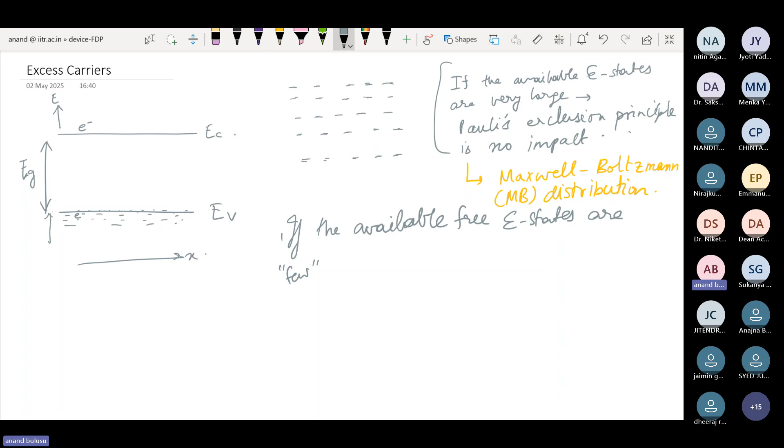So if the available free energy states are few, these are all layman kind of language, not a formal way of looking at things. But we want to develop an intuitive understanding, that's why we are doing this. If the available energy states are few compared to electrons, so what it means is then Pauli's exclusion principle has an impact on the distribution.

Okay, so this kind of a distribution is called Fermi-Dirac distribution.

So these distributions are derived in a way similar to the way we do in say 11th, 12th standard. It is like you have n number of boxes, and you want to fill them with balls. Each box has an occupancy of two balls. How would they get distributed if there are 100 boxes and 10 balls coming, if there are 100 boxes and 90 balls coming, like that. So those problems, the way you solve, the same way these distributions are solved and derived. This distribution formulae I will be giving directly, but they are derived in the same way. It's the same kind of arguments.

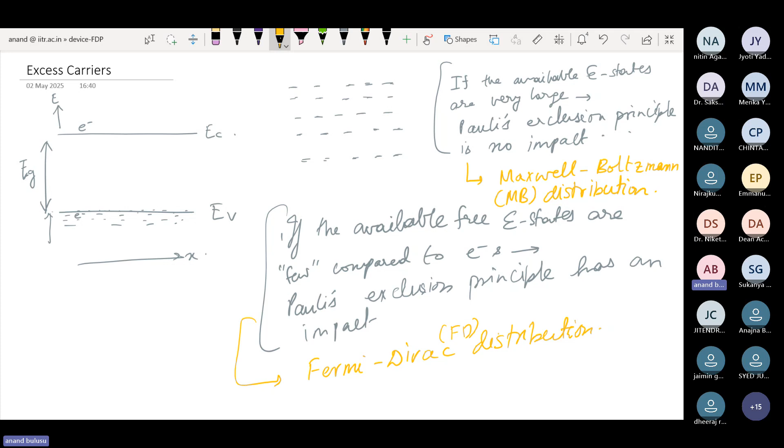Only thing is that you are now not with 100 boxes and 90 electrons, 90 balls, but you are dealing with some 10 to the power 20 boxes and 10 to the power 12 balls, like that. So you are dealing with very large numbers, and that is how this distribution formulae come. But otherwise, the way they are solved or derived, this distribution formulae is just like the way we did it in the case where you needed to find out the probability of the balls being distributed, which would depend on when there are certain number of empty boxes and certain number of balls to be distributed within those empty boxes.

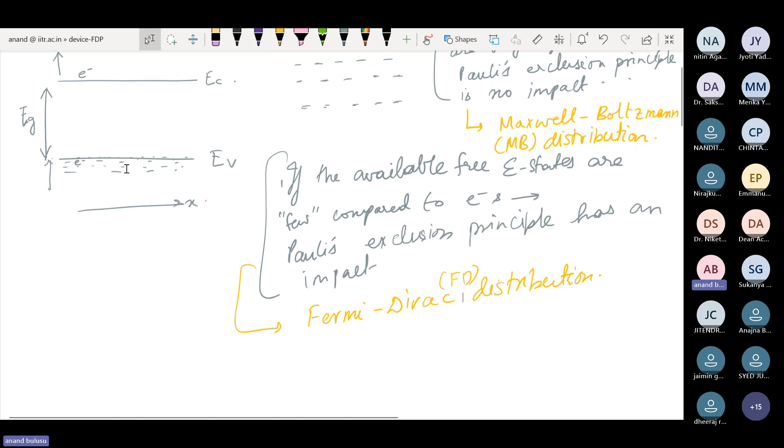Okay, so what is this Fermi-Dirac distribution? Now these electrons are here at 0 Kelvin. What would be the nature of the electron? Suppose you are not dealing with semiconductor, say silicon, but you are dealing with a metal, suppose.

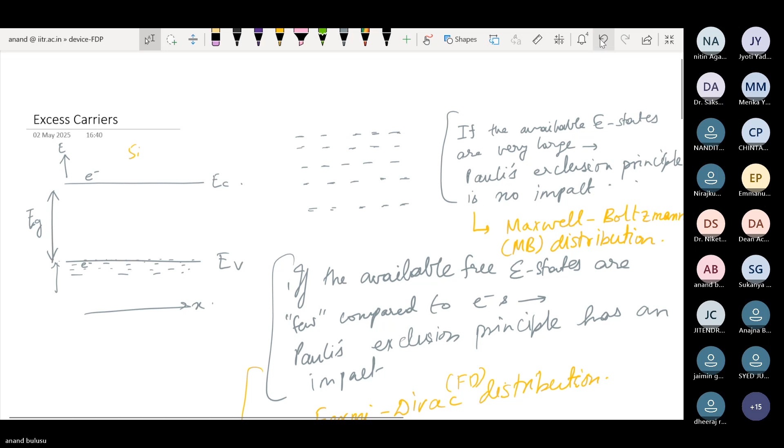Suppose you are dealing with a metal. So in metal, there are these two... you will not find these two bands and all that. It's all a continuous band of energy states.

So in that, what is the distribution? You find that at 0 Kelvin, the electrons are all within a certain, below a certain energy level. So all the electrons are below a certain energy level at 0 Kelvin. So the electrons have no energy in that sense, I mean they are bound tightly and they have no ambient energy coming from the ambient environment. So they are all below the so-called Fermi level.

Okay, once there is, or you can also plot it this way. Sir, I'm sorry to disturb you, your presentation is not visible to us.

Maybe you need to present it again. Okay, so was it visible earlier? Ah yes, it was visible. Just now it is not visible, sir. Okay, so maybe I need to share it again. Yes sir, it somehow got hung and therefore I had to redo it, so I think I need to reshare it. Now is it visible? Yes sir, now it is visible, sir. Actually, tell me if you have already covered the topics that I'm discussing. Sure sir, I have not covered these topics. So you are going right, sir. Yes sir, so tell me whenever I need to stop. Okay, yes sir, yes, yes.

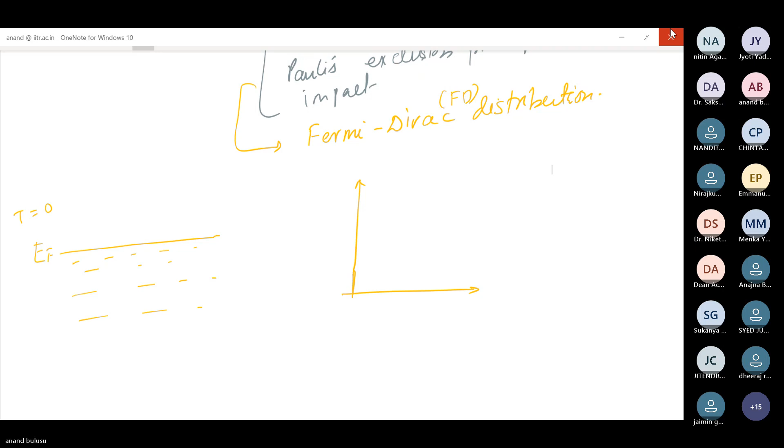So this is energy, and suppose this is the number of electrons.

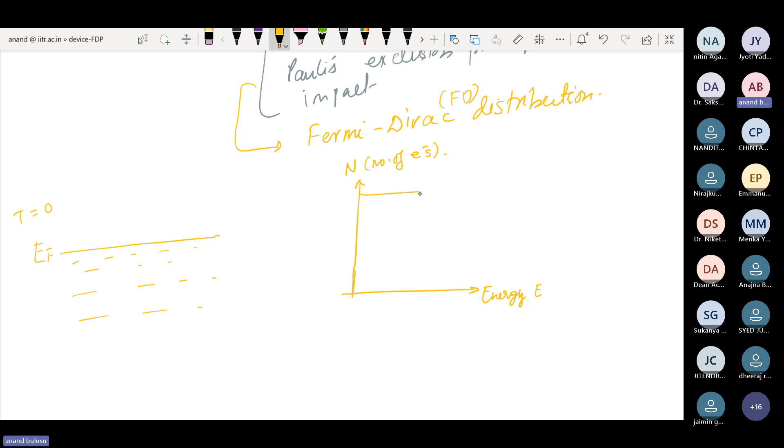And this is energy, electron energy. Okay, so at temperature T = 0, what you find is that the number of electrons is like this. And this energy we call EF, Fermi energy or Fermi level.

Suppose we are dealing with a scenario where all the energy levels can have equal number of electrons. So there are equal number of energy levels available below and above the Fermi level, and energy levels are all symmetric. We are dealing with that ideal kind of material. Below the Fermi level, all the energy levels are now occupied at 0 Kelvin. So this is for 0 Kelvin.

Now you have increased the temperature slightly, so T1 greater than 0. What is the distribution now? It would look this way.

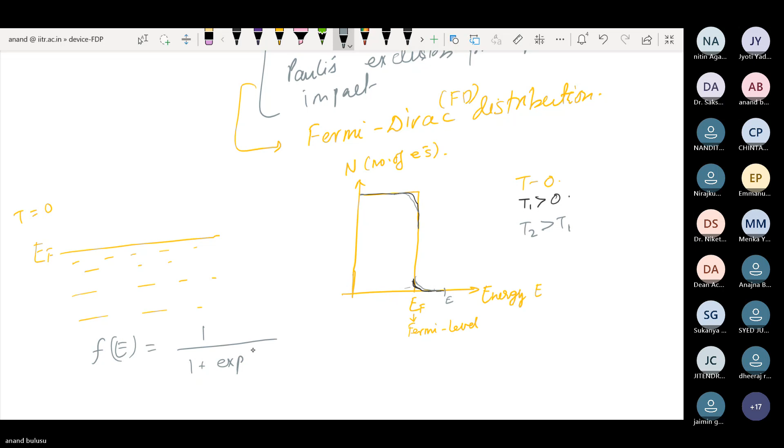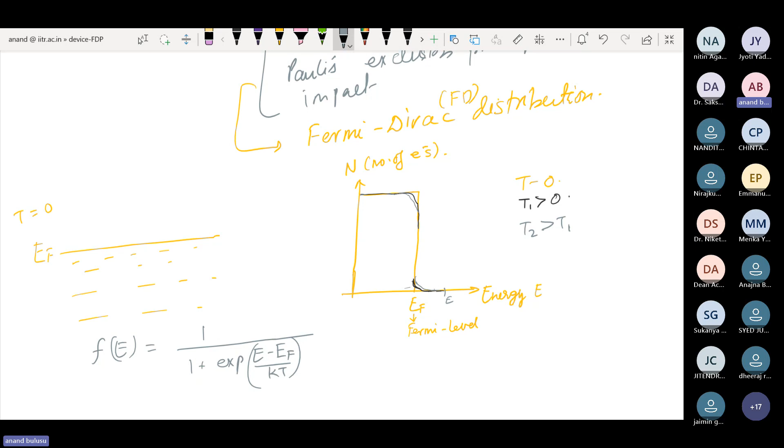So how can this be represented mathematically? You would say that the probability of occupancy of an energy state E is 1 by 1 plus exponential of E minus EF by KT. K is Boltzmann constant, T is temperature, EF is this mathematical quantity, Fermi level or Fermi energy. So this is the probability distribution function - the Fermi-Dirac probability distribution function.

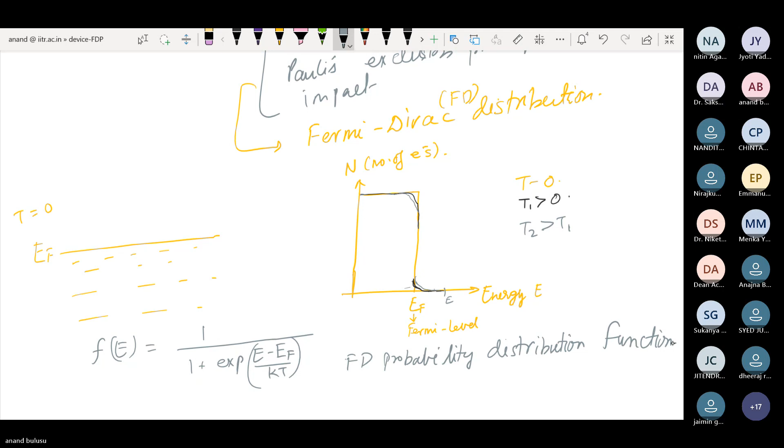So how does this behave? As E increases beyond the Fermi level, if the temperature is 0 Kelvin, this will correspond to a very large value tending to infinity, and therefore f of E, the probability, would be 0. And when E is smaller than EF, then this would tend to 0, and f of E would tend to 1. That's why you have this distribution as a step here at 0 Kelvin.

As you increase temperature, suppose now temperature has been increased to T1 here. So when you increase E beyond EF, this will now be larger than 1, but it would not tend to infinity. And therefore you have a small value here. It is large because it's an exponential function.

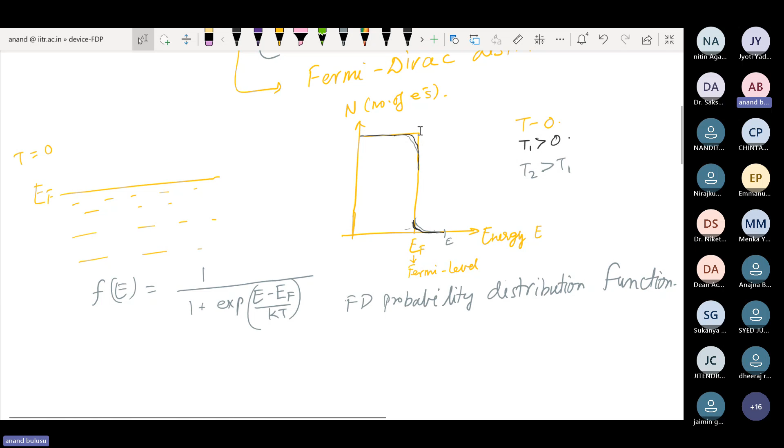What about the energy values here? You would find that as E is smaller than EF, E minus EF is a negative quantity, and therefore this exponential term is smaller than 1. If it is smaller than 1, then obviously f of E is smaller than 1, but it is not very small. So this is 1, some normalized value - or you can say number of electrons divided by n cap, where n cap can be the largest number that can be occupied. Or you can also say that this is the probability of occupancy.

Probability of occupancy of each of the states. So it is not number of electrons, it is actually number of electrons divided by the maximum number possible for that energy state. That is like probability of occupancy of that energy state.

This probability distribution function is f of E, given by this formula. As we had seen at temperature 0, for any energy value larger than EF, this tends to 0, and for any energy smaller than EF, this tends to 1. So all the energy states are occupied for an energy E smaller than EF.

Now, as you increase temperature, we see that for E larger than EF, though this exponential factor term is very large, it is not infinite, it has a finite value. Therefore, f of E is now very small, but it is not 0. It doesn't tend to 0.

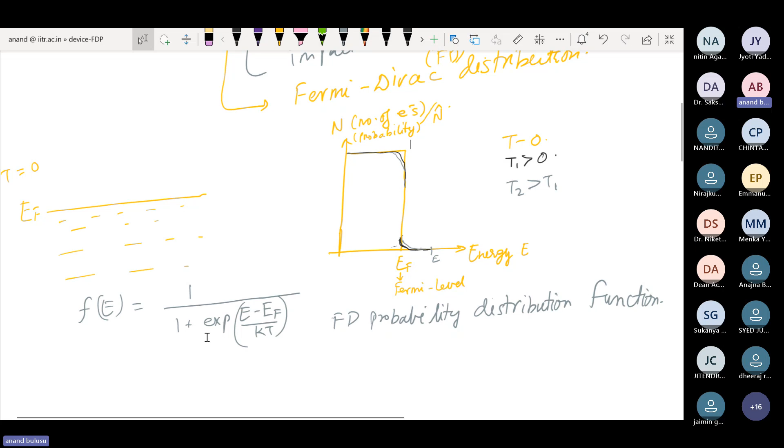Likewise, for energy smaller than EF, this is a negative value, and therefore f of E is smaller than 1, but still not 0. Suppose this value is 0.5, then f of E is 2 by 3.

Now you increase temperature from T1 to T2. What happens? For the same value of E, now this exponential term is smaller, so f of E is larger. Therefore, for the same energy, larger probability of occupancy is there above EF.

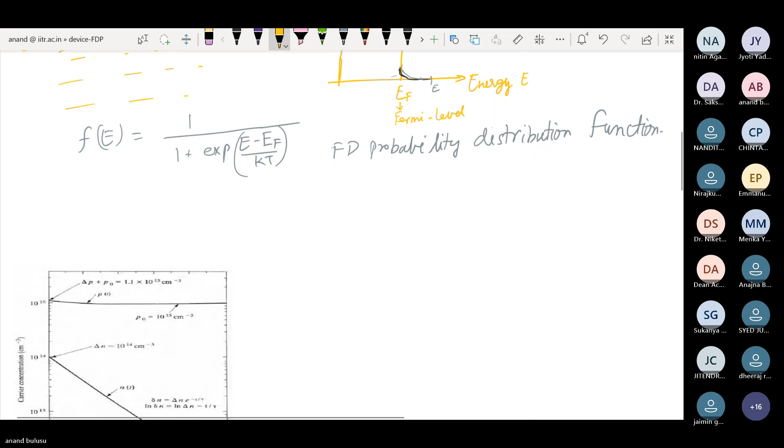Now let us see what happens for the same value of delta E. So f of E is 1 by 1 plus exponential delta E by kt. Let us say delta E1 is E1 minus EF, call this E1, and equally away from EF is E2.

Now let us say that delta E1 is equal to delta E2. But first let us write down the probability distribution function f of E2: that is 1 by 1 plus exponential minus delta E2 by kt. This is the probability distribution function now. If delta E1 is equal to delta E2, then what is the relationship between f of E1 and f of E2? Let us find out.

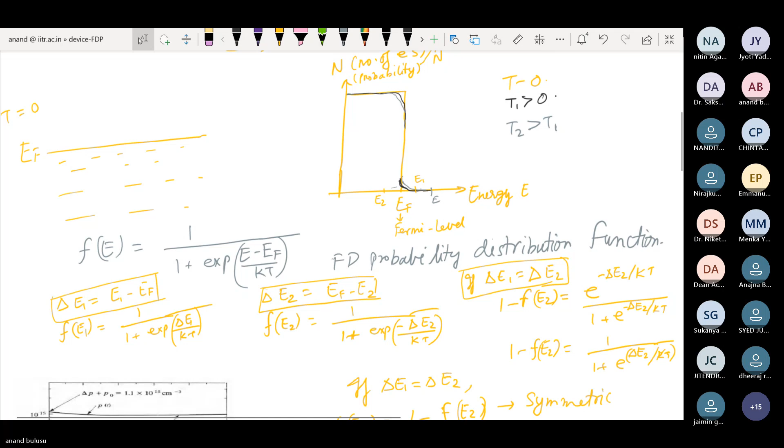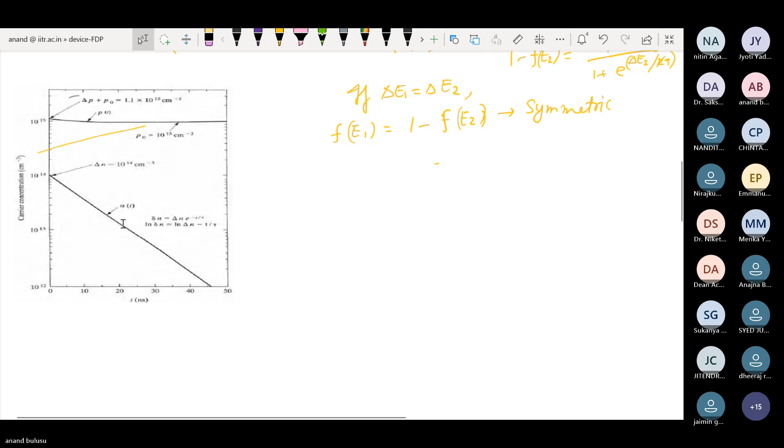Anything to discuss here? Let me manage the figures and then I'll again come back. Everything's getting messed up. It hangs. I don't know why it happens that way. It becomes hot and it gets stuck, so I'll have to share again. Yes sir, yes sir, just now the slides are not... yeah, yeah, I'll share again.

So now let us look at the semiconductor scenario.

Let us again look at n by n cap, which is the probability distribution, probability density, and let us look at this energy axis. So let us say that this is the value of Fermi level EF. So in semiconductor, as there was a discussion in the morning, there will be a valence energy band and a conduction energy band, and this is the energy gap. Let us draw it better, let us say that it is so close.

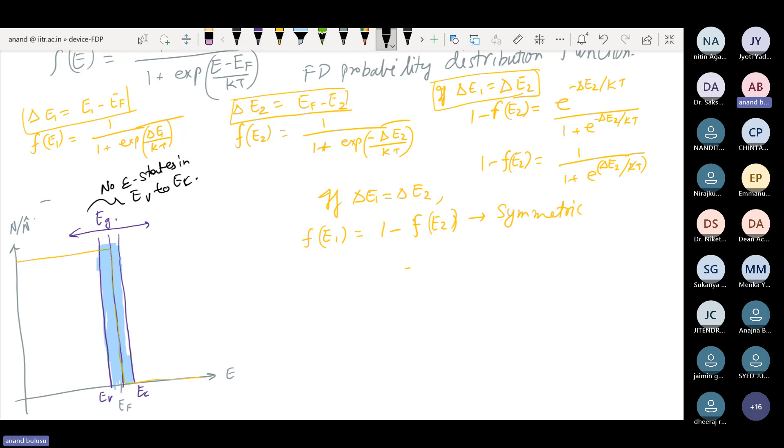So at 0 Kelvin, there is no occupancy in the energy gap because there are no electrons in the energy gap. It's not because of the Fermi Dirac distribution; there are no energy states available in the energy gap. No energy states in the gap EV to EC. Ideally there are no energy states there, and therefore the occupancy is zero. It's not zero because of the Fermi Dirac distribution; occupancy from EV to EC is zero because there are no energy states there. In all other energy states, the occupancy is same as in this plot.

So it's as if you have put this EC and EV here. Superimposed EV and EC here. It's as if you have done this.

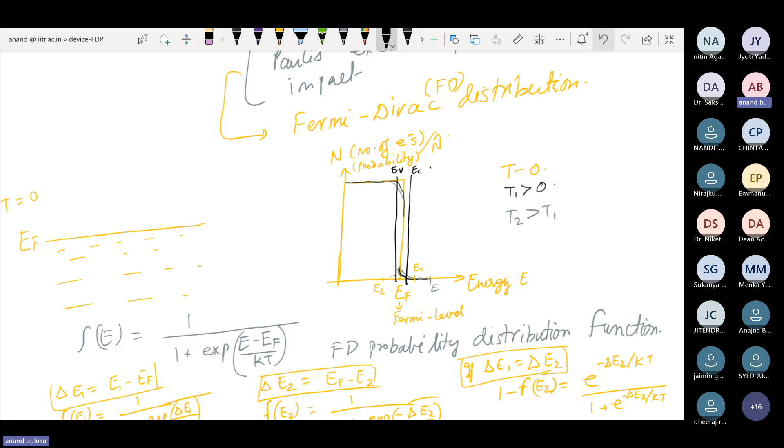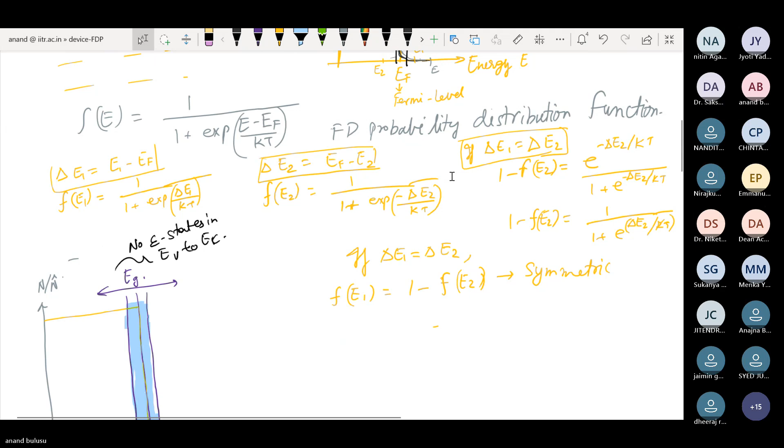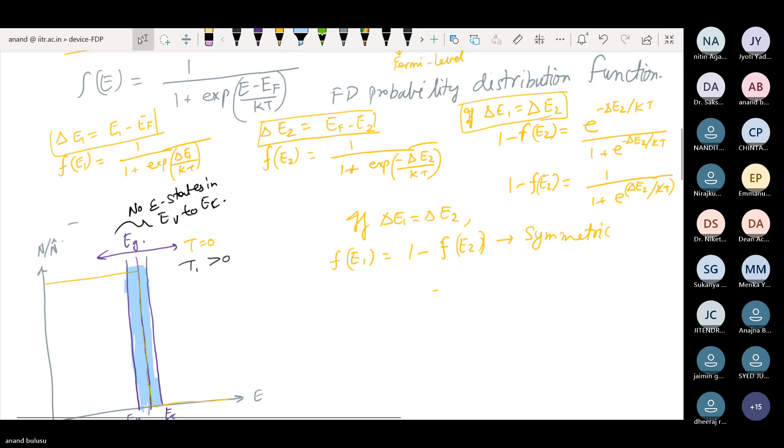Is that fine? So now again for the same value T1, which is larger than 0, you will have a similar distribution as earlier, and the symmetric one here. And for T2, which is larger than T1, you will have a similar distribution as earlier. So what is happening here?

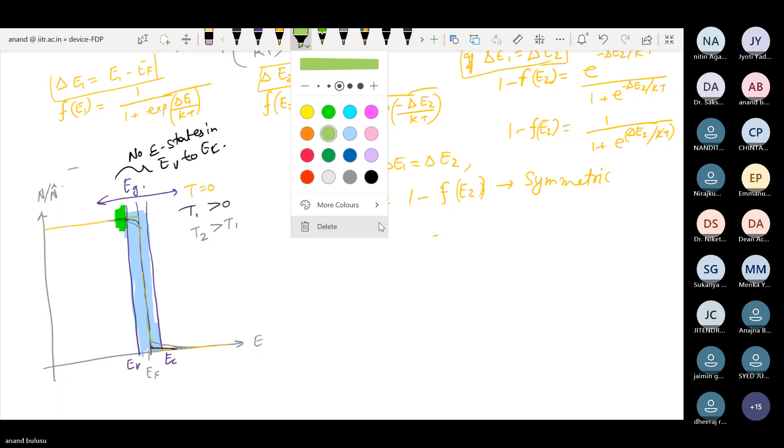So in the valence band, as you are increasing temperature, because of the more available thermal energy, electron states are getting empty. Likewise, in the conduction band, the electron states are being occupied, energy states are being occupied close to the conduction band edge. This is the conduction band edge. And close to the valence band edge, electron states are getting empty, because at the edge the electrons are having maximum energy. They have the maximum probability to gain thermal energy and go into the conduction band.

So is this fine? Now let us look at a scenario: where is this Fermi level? In silicon, this Fermi level EF is approximately close to EC plus EV by 2. It's not exact, but for all our calculations, for undergraduate teaching purposes, it is good enough to assume that for silicon it is EC plus EV by 2. And the energy band gap for silicon is around 1.1 electron volt.

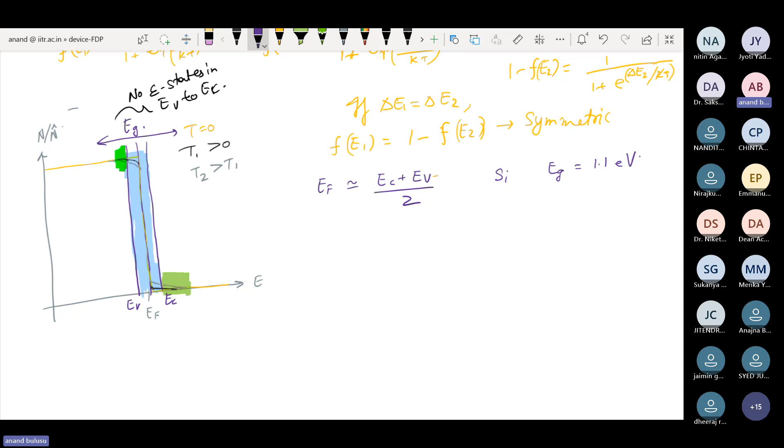So this energy band gap is nearly 1.1 electron volt. So what happens if EF minus EV or EC minus EF is very large compared to KT? Why are we discussing that? We are saying that this Fermi level in silicon is very close to EC plus EV by 2.

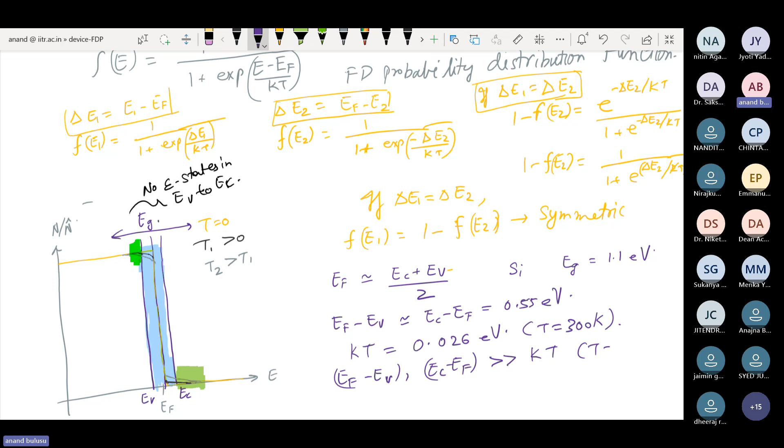Okay, and we know that, so what is the value of EF minus EV? EF minus EV is nearly equal to EC minus EF, which is 0.55 electron volt. What is the value of KT at room temperature? 0.026 electron volt. So EC minus EF and EF minus EV are both much larger than KT at room temperature. These are both very large compared to KT.

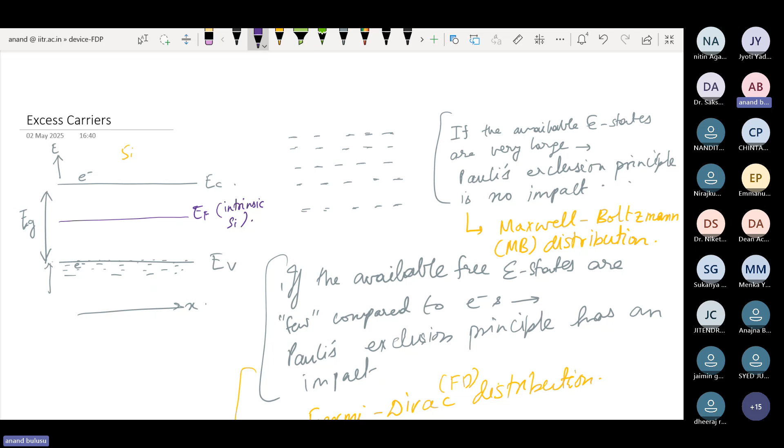Now, if I want to find out the electron probability of occupancy of electrons at the edge of the conduction band, that is in this band diagram here, and you are saying that in intrinsic silicon EF is here, so you are discussing the electron occupancy here and here. So how will you find that out? Just at the edge.

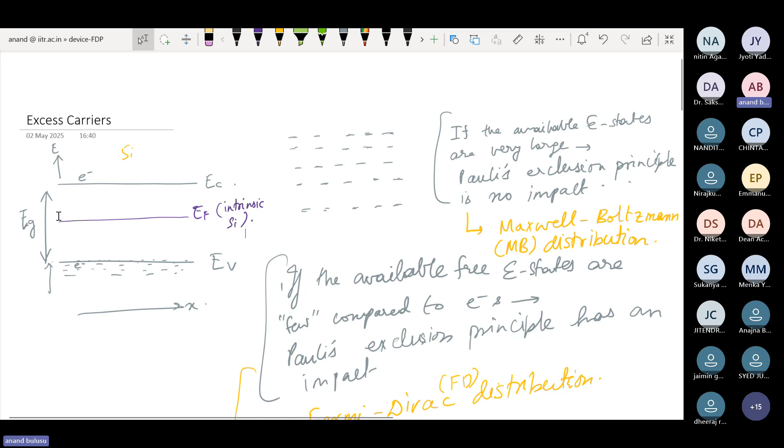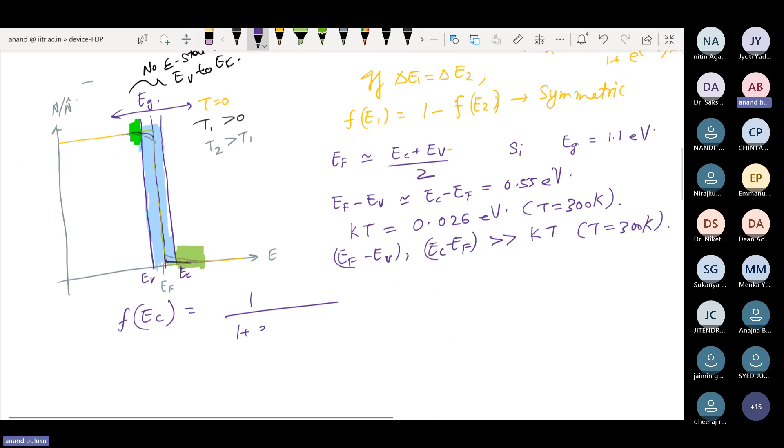One by one plus exponential of EC minus EF by KT. What is this equal to? This is when EC minus EF by KT is much larger than one. So therefore, this is a very large quantity, and this becomes equal to exponential of minus EC minus EF by KT.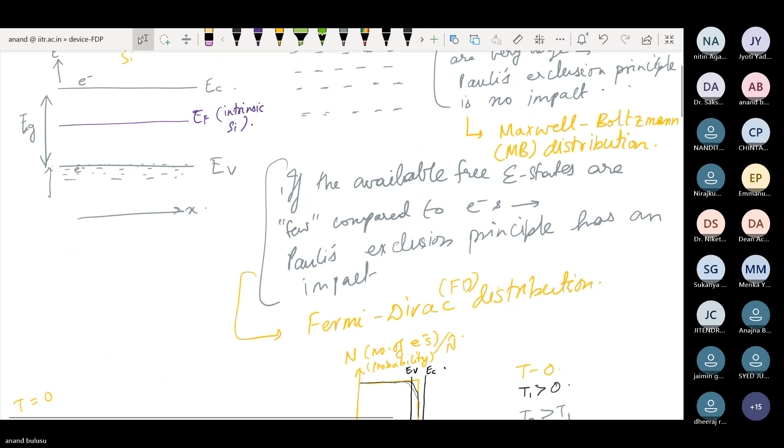Likewise, what is the probability of electron occupancy somewhere here, very close to EV? That is this band diagram here at room temperature. F of EV is 1 by 1 plus exponential of minus EF minus EV by KT.

Now we know that this is going to be a very small value compared to 1. So it will be like this: you know that 1 by 1 plus x, where x is very small compared to 1, is nearly 1 minus x. So likewise, this is then 1 minus exponential of minus EF minus EV by kT.

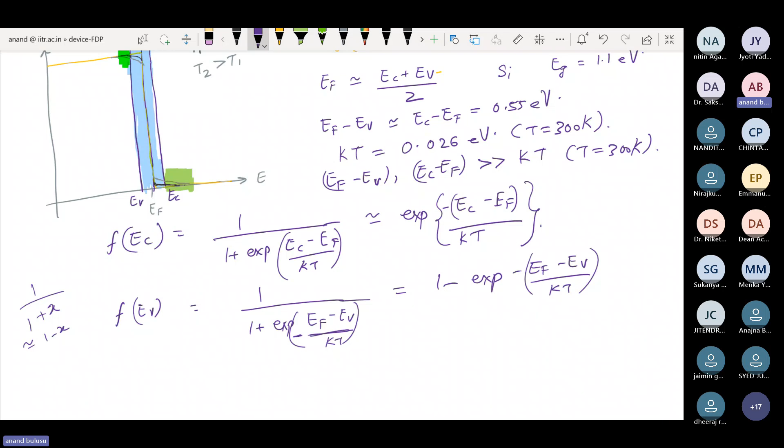So what is the probability of electron energy states being empty? 1 minus f of EV at the edge of the valence band. So that is exponential of minus EF minus EV by KT.

This and this look similar, and they should be, because as many electrons which leave the valence band and go into the conduction band, that should be the probability of empty energy states in the valence band. So what we are observing is that this is the Maxwell-Boltzmann distribution, and this is the Fermi-Dirac distribution. This looks like Maxwell-Boltzmann distribution.

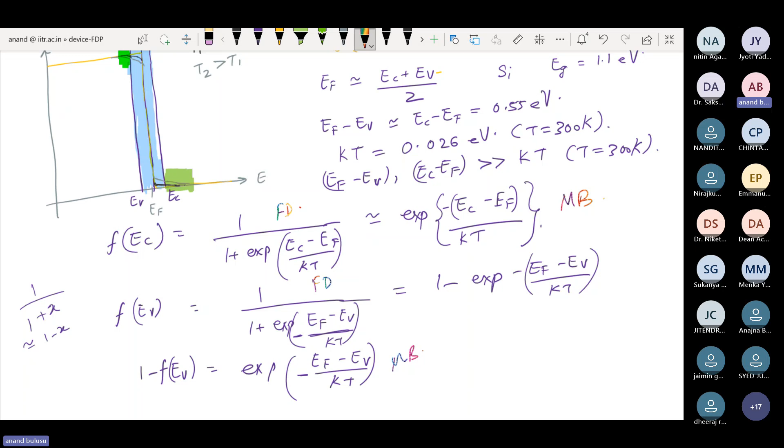So whenever E minus EF is very large compared to KT, the Fermi-Dirac distribution reduces to the Maxwell-Boltzmann distribution. What is the reason? Physically, as we discussed earlier, whenever EC minus EF is very large, almost all energy states in the conduction band are empty. Since they are all empty, Pauli's exclusion principle has little impact.

Now let us see one very important property: invariance of Fermi level in equilibrium. So let us rename the thing, let us call it...

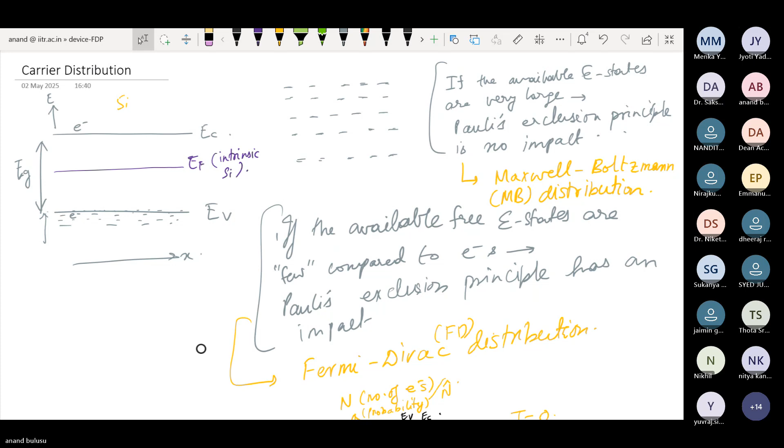Suppose there are two materials, M1, M2, two arbitrary materials, with this as the interface.

Suppose both the materials are close to each other, placed close to each other - any kind of material - and the entire system is in thermal equilibrium.

What do you mean by thermal equilibrium? If it is in thermal equilibrium, there is no net exchange of energy from outside the system, and also no net exchange of energy within the system. So what does it mean? It means net electrons would not be moving from one side to another, or net electrons cannot be moving from a higher energy state to a lower energy state. Because if electrons are moving like this, energy would be getting dissipated, and if electrons are moving upward in energy state, then energy would be consumed. So both cannot be happening in thermal equilibrium. It means the net number of electrons are not moving upward or downward the energy states - they must be balanced.

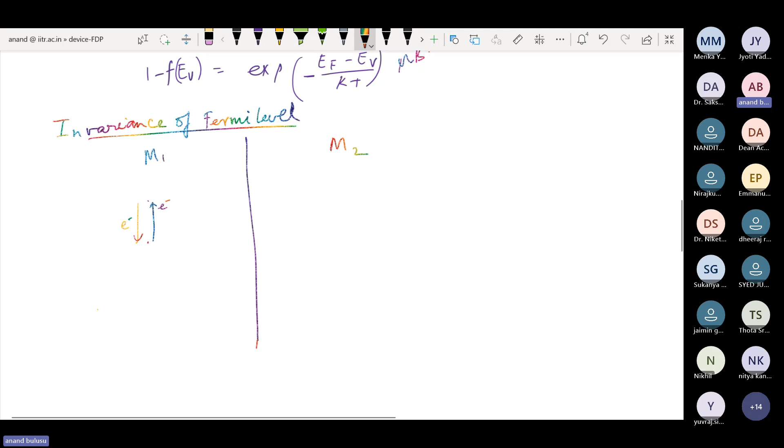Likewise, within the same energy state, if an electron moves from here to here, and net electrons are moving, keeping on moving, that means there must be some energy supplied for them to move in one direction, because otherwise there will be random movement. And that must be balanced again by electrons moving in this direction. So there cannot be any net exchange of electron energy from one higher energy state to a lower energy state, neither can there be a net movement of electrons within the same energy state.

So how is this possible? Let us see. Let us assume that there are two Fermi levels here. M2 has a Fermi level EF2, M1 has a Fermi level EF1. If this is the scenario, let us say that there are two electron energy states, or this electron energy state E. In M2, the number of energy states is N2, and in M1, the number of energy states E is N1.

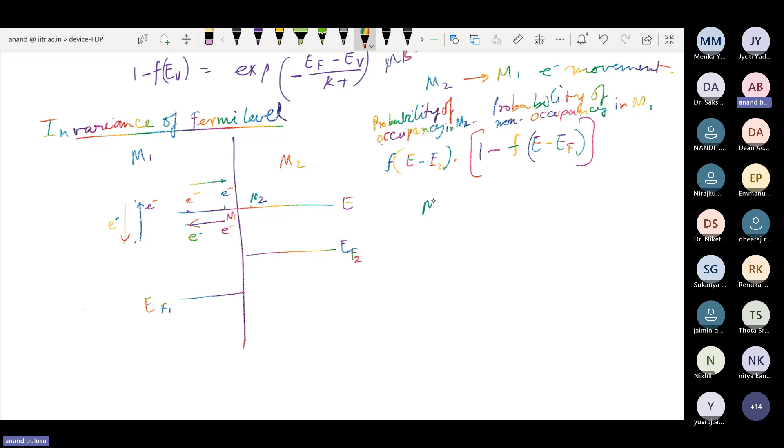Likewise, what is the probability of electron movement from M1 to M2? By similar argument, this is f of E minus EF1 into 1 minus f of E minus EF2.

Please stop me whenever you feel that I need to discuss again.

So in thermal equilibrium, both these movements should be equal, isn't it? Only then there is no net exchange of carriers, electrons. So f of E minus EF2 into 1 minus f of E minus EF1 is equal to f of E minus EF1 into 1 minus f of E minus EF2.

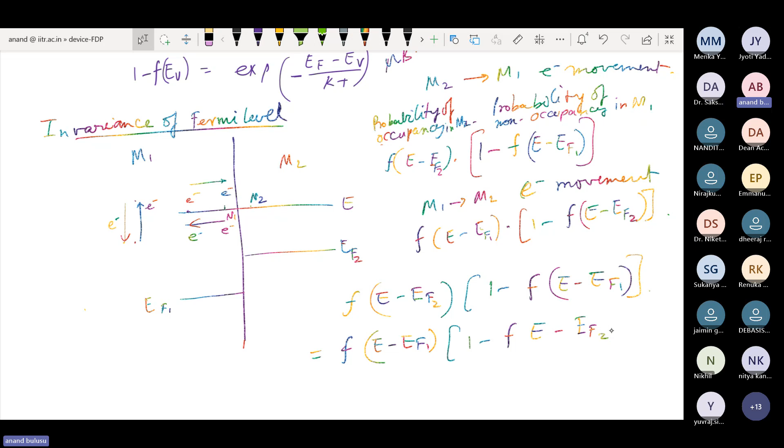So what does that mean? It means f of E minus EF2 is equal to f of E minus EF1. When is it possible? It is possible only if EF2 is equal to EF1.

So what do you mean by this? You mean to say that the Fermi levels must be invariant in thermal equilibrium. So this is a major conclusion. But whenever you don't have thermal equilibrium, the idea of Fermi level is not valid. Then there is the idea of quasi Fermi level, which we'll discuss later. So Fermi level is invariant in thermal equilibrium.

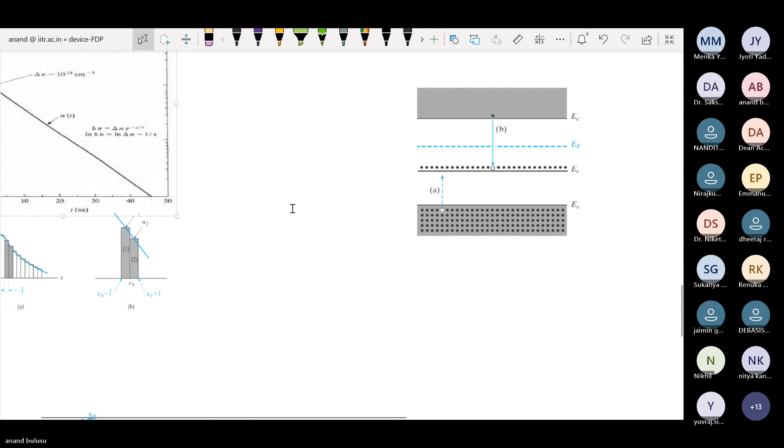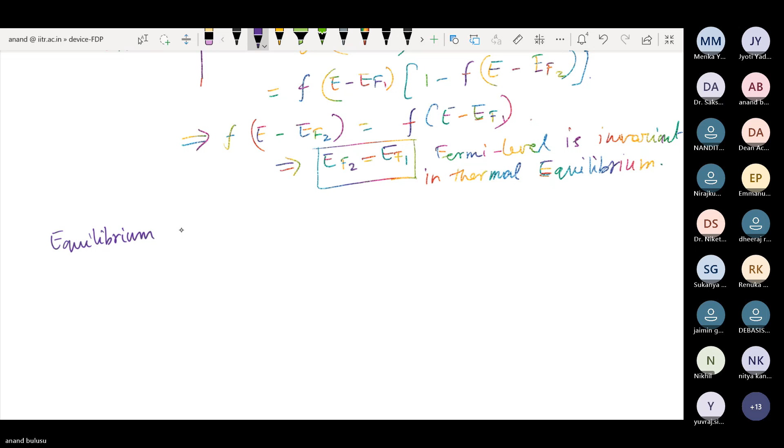These figures, let me move them down because I'm not going to use them now. So now let us come to equilibrium carrier concentrations.

So as we had discussed, the Fermi Dirac distribution in intrinsic silicon would get reduced to Maxwell Boltzmann distribution, isn't it? So we can say that the probability of occupancy in, say, valence band, in conduction band, would be f of EC at the conduction band edge, and we are interested at the edge because there are very few electrons in the conduction band now, and almost all of them would be at the lowest energy, that is, they will be at the edge.

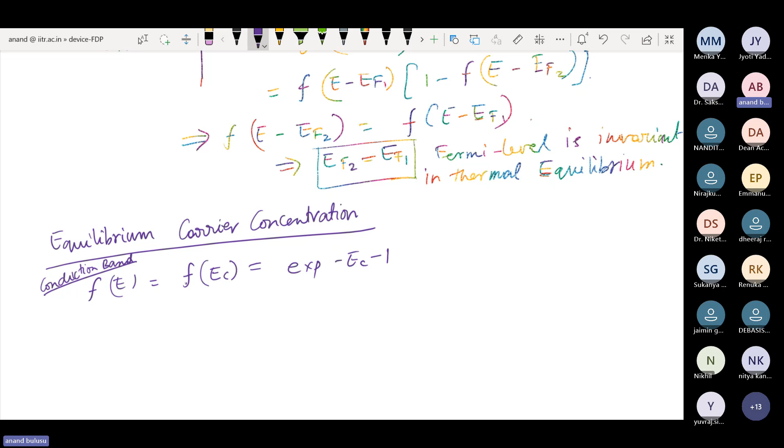So that's why we are interested at the conduction band edge. So here the probability distribution function is now a Maxwell Boltzmann distribution function. So it is exponential minus EC minus EF by KT.

Okay, so what is the value of electrons in the conduction band?

That would depend on how many empty energy states are there. This is the probability of occupancy. If you know how many empty energy states are there, they are numerous, of the order of 10 to the power 20 or something, very large per centimeter cube. So with that large number, if you know the probability of occupancy, you can predict how many electrons per centimeter cube would be there in the conduction band.

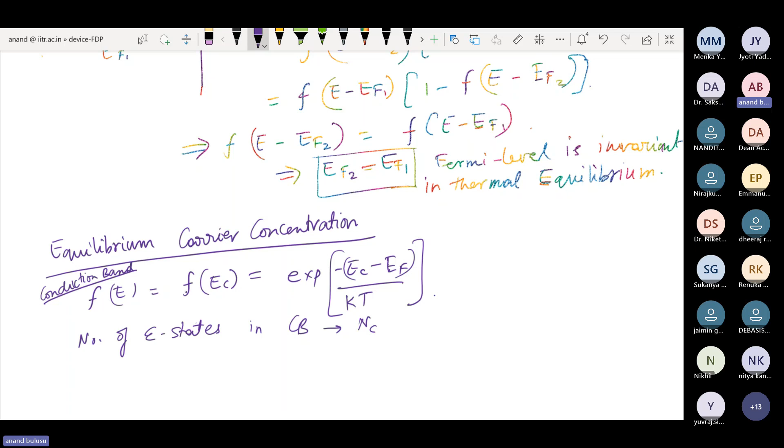So if the number of energy states in the conduction band is Nc, then the electron concentration in intrinsic silicon is Nc exponential Ec minus Ef by Kt. What is this value of Nc? Nc is 2 times 2 pi...

So what is this Mn star? It is the effective mass of electrons. What is effective mass?

When you look at the quantum realm, if the electron gains some energy - in conventional classical physics, if an electron gains energy, it can move with that new energy, and it can take any value of energy, continuous. Whereas in the quantum realm, the electron cannot take any value of energy. It would take energies only wherever there are available states, available energy states.

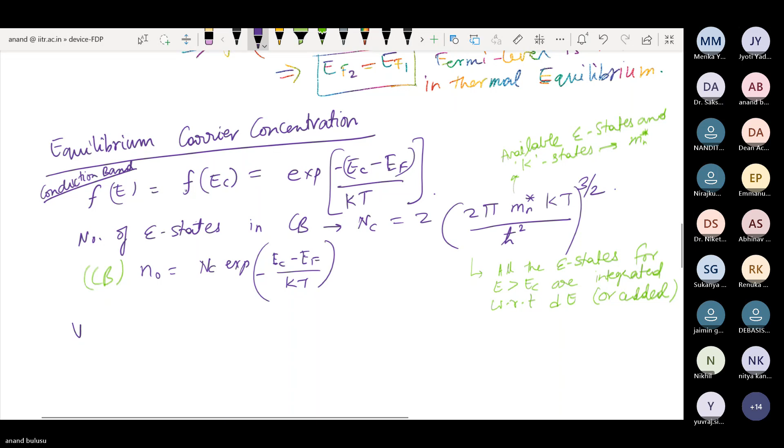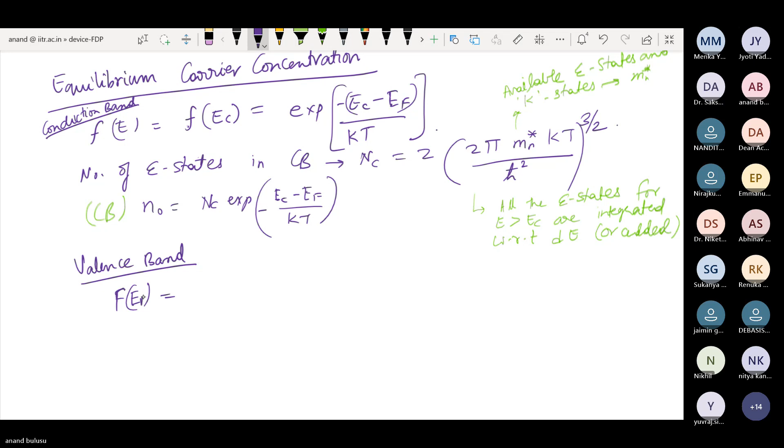Okay, so now let us look at the valence band. Let us look at the edge of the valence band. Why the edge of the valence band? Because that is where the non-occupancy of electron energy states would be maximum. So that is exponential minus EF minus EV by KT.

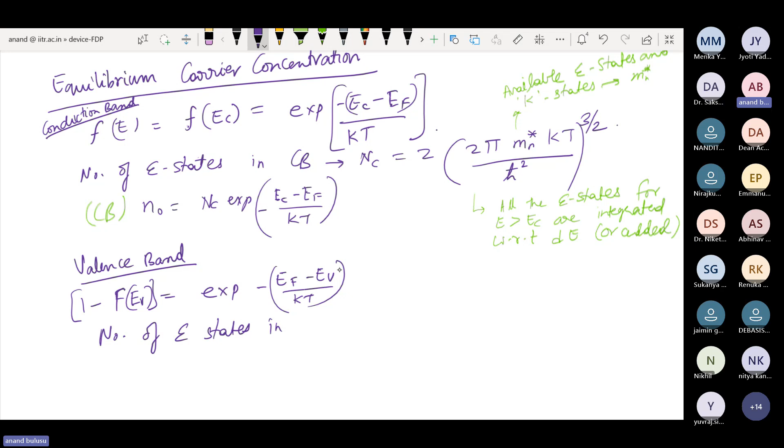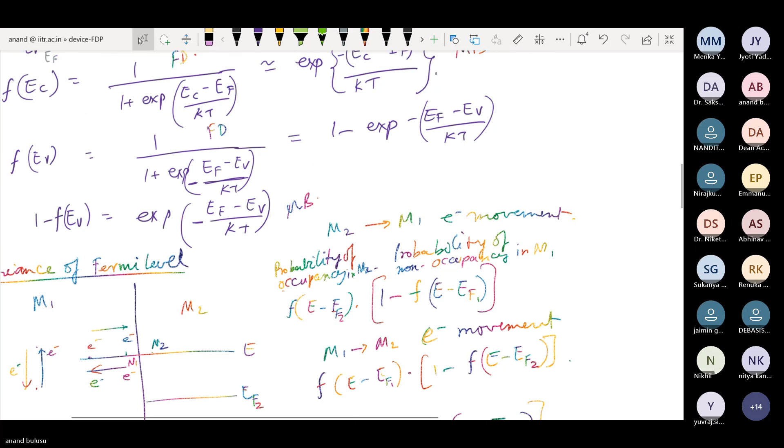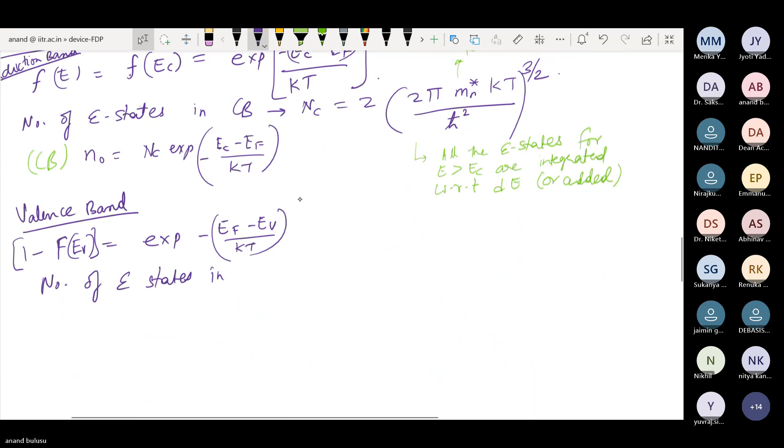Now suppose the number of electron states... this is actually 1 minus this thing, the probability of non-occupancy. This is the probability of non-occupancy of valence band energy states at the edge of the valence band.

So now the number of energy states in the valence band, again it is obtained similar to Nc. So it is called NV, and it is 2 times 2 pi MP star, which is the effective mass of holes, KT, to the power 3 by 2.

So where are we here - what is the probability of non-occupancy of valence band energy states? That probability is the probability of occupancy by holes. I think you were introduced to the idea of holes, isn't it? Electrons and holes. Yes sir, yes sir, yeah.

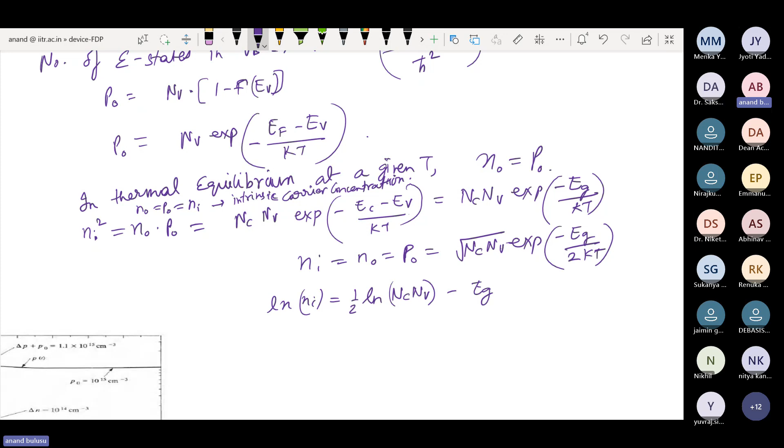So now let us look at what is the intrinsic carrier concentration, and how does it vary with temperature? If we plot log of this, we will see that log of Ni is equal to half log of Nc Nv minus Eg by 2kT. So this is a linear relationship with 1 by kT.

So that's why if you plot it this way, with 1 by T on the axis with respect to log scale here, suppose 10 to the power 8, 10 to the power 10, 10 to the power 12, like that, then for silicon, 10 to the power 14, for silicon you would observe that this would be a straight line coming like this.

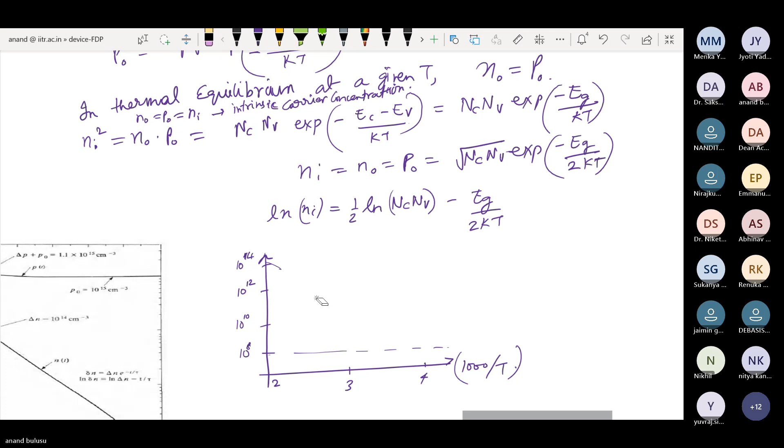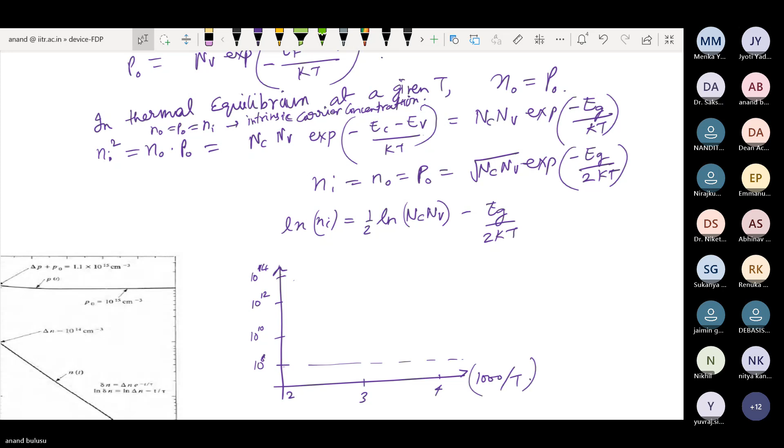Not able to draw it properly, but it would be a straight line, isn't? And why should it be a straight line? That we have just now discussed. So this is about intrinsic silicon.